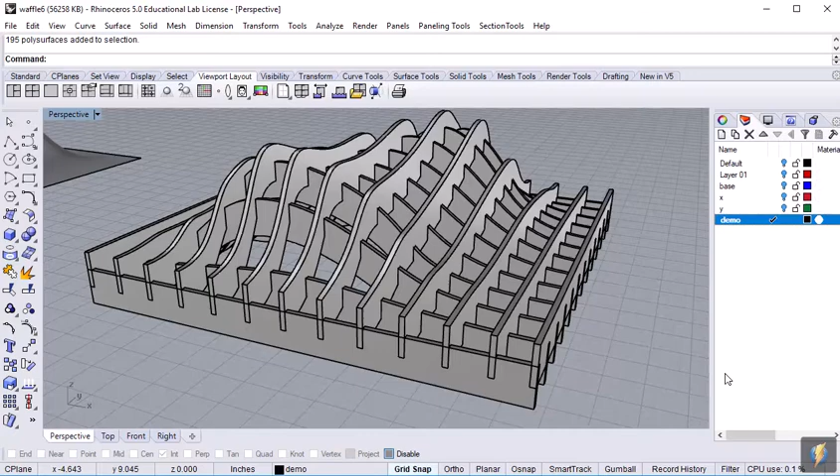If your Boolean split worked really well, then when you select one of these items, apparently it goes back to group again. It's kind of funky. I don't understand it, but you'll have to play with it a bit. So let's ungroup them and I'll show you what's going on in there.

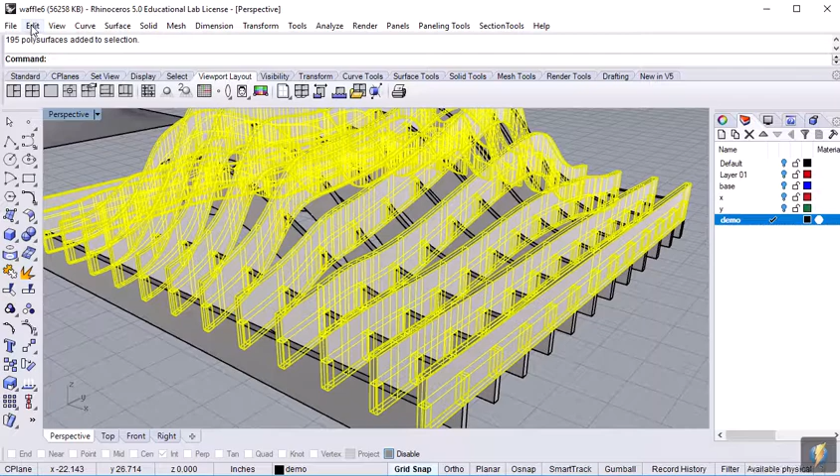Now you can see what's going on is a bit complicated because there is one piece that doesn't have the notches cut out, and then there's another one that does. So if we look at that front row, it's got all the notches cut out, and if we ungroup this one, same thing, we can select it, and the second one has all the notches cut out.

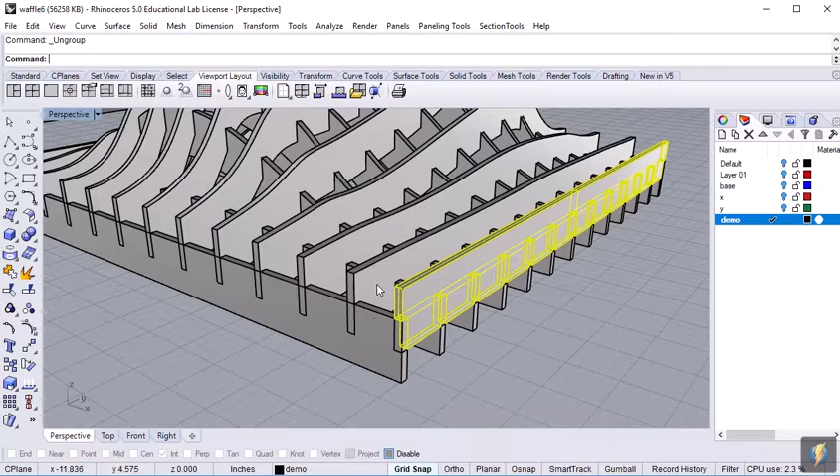Those are the pieces that we want to laser cut. The other ones we don't need, so you could get rid of them if you want, delete them. You just have to keep it clear, because every piece at this point that we're going to select is going to be the piece that has the notches cut out on them.

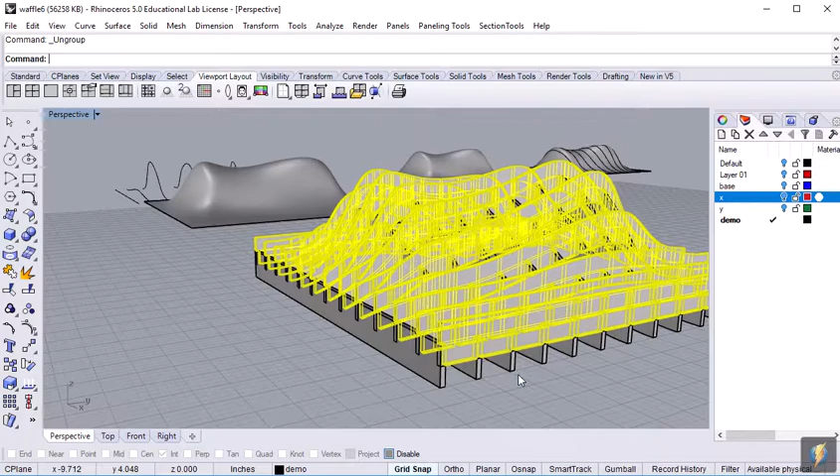So what I did here was I selected every, on the x-axis, each of the notched pieces. And what you can do is you can copy all of them to a colored layer. I did this already.

So if you look at the red, the y-axis has a green line. To remember that all the Y pieces are green—you know, Y is green—we can turn it on. So if we copy to a layer, here I made a layer called Y, and here I made a layer called X. I did that before the demo.

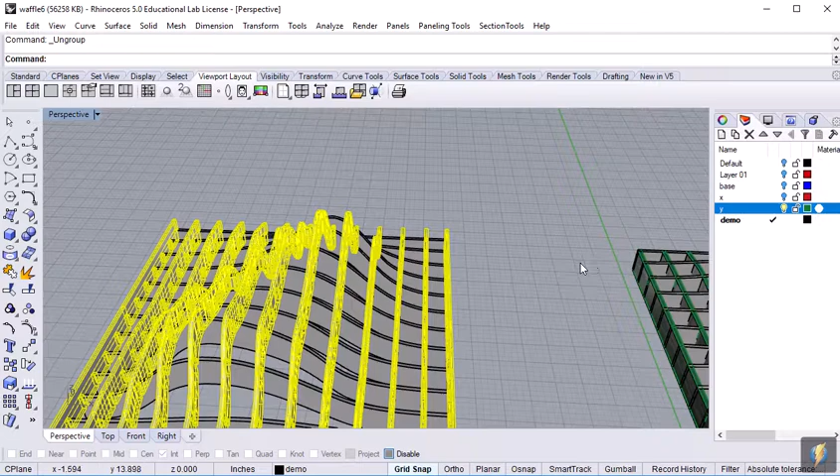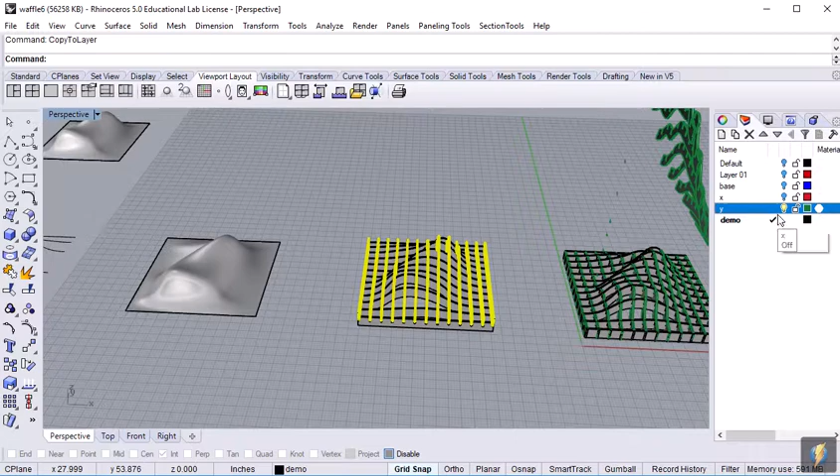The command for that is copy to layer. You just type copy to layer in there and you'll get the layer that you want to copy it to. What it'll look like is something like this—so I made all of these Y pieces green.

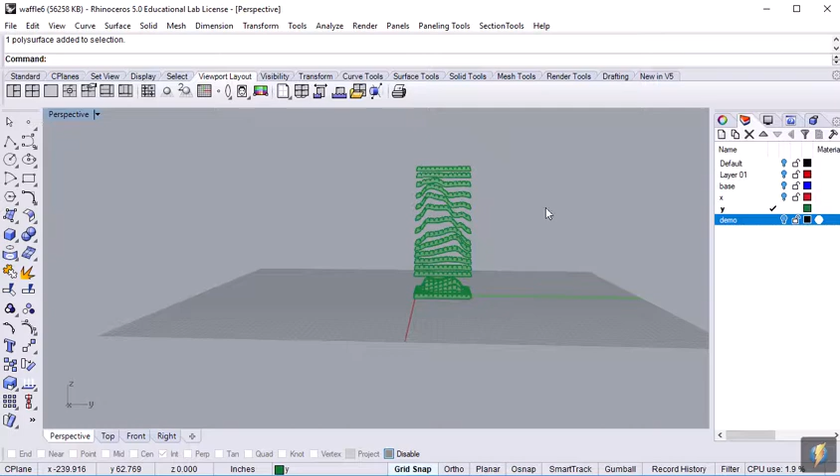Now to export these, we want to get all these pieces exported into Illustrator as an Illustrator file. So what I did—this is where it gets a bit time consuming and tricky—and I've got a lot of pieces in my demo.

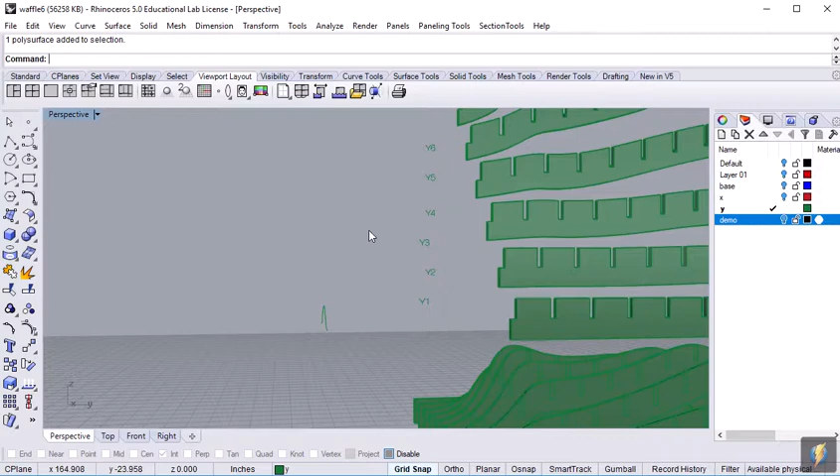You probably won't have this many pieces because it's way too complicated. But all that's happening here is I just raise them up. I just select, and you have to keep everything in order, so the trick now is all these pieces are going to be cut. But how do we know which piece—like to get them back together when they're cut out of plywood—it's really tricky.

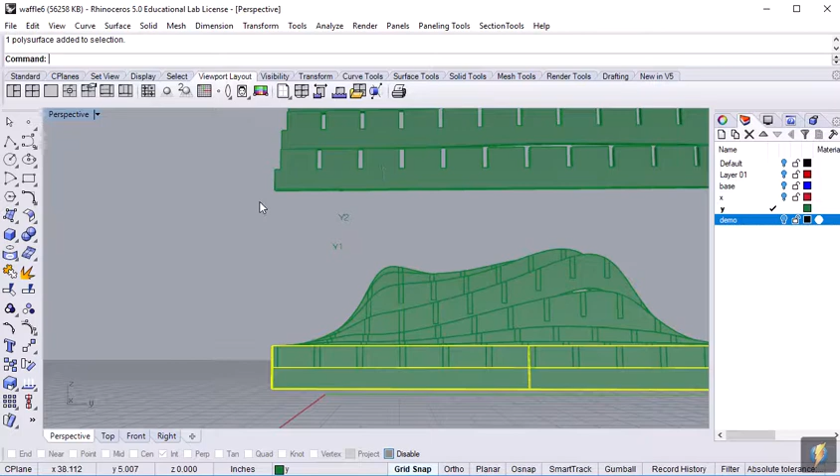So we're going to label them, and the laser cutter is going to label them. But to keep it all straight, you need to start out at this point and you're just selecting each piece and moving it up in order. So the first piece goes up here, the second piece, third piece, etc. And to do that, you have to make sure that you're in a two-dimensional view.

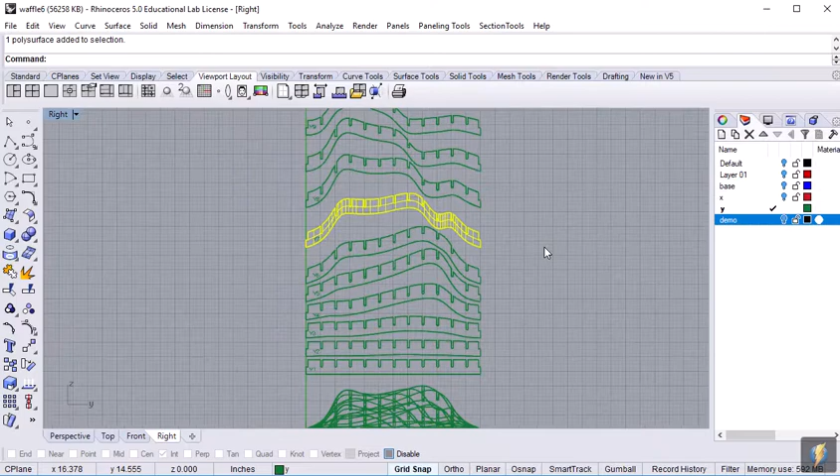So in the right view here, viewed from the right, when I export this, these are not going to be distorted, because if you export them from the perspective window, the lines will distort for the perspective.

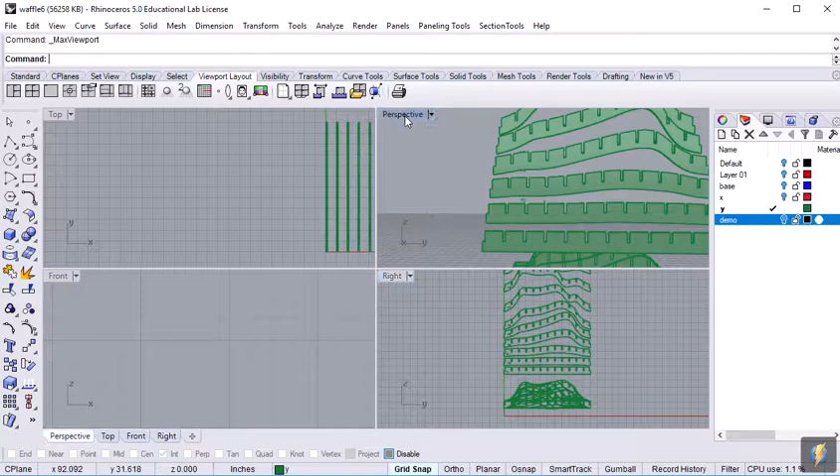And then the next thing we're going to look at—just so everybody's clear—I grabbed the first one, that's Y1. The second one in that row, Y2. So they're all basically on one dimension.

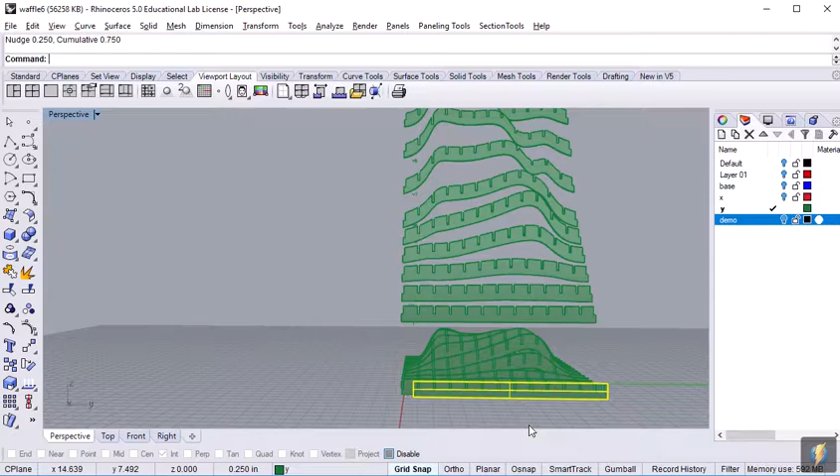So when you look at this from the top, from the side, it doesn't matter that they're spaced out, because you're just selecting one, and you use the option key. You want to go up. So the main thing here is that when you're in a two-dimensional window, they all line up and you're getting exactly what you want.

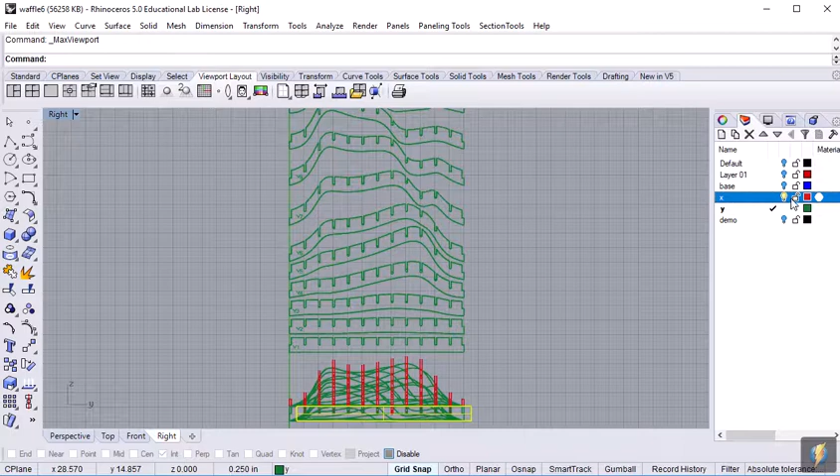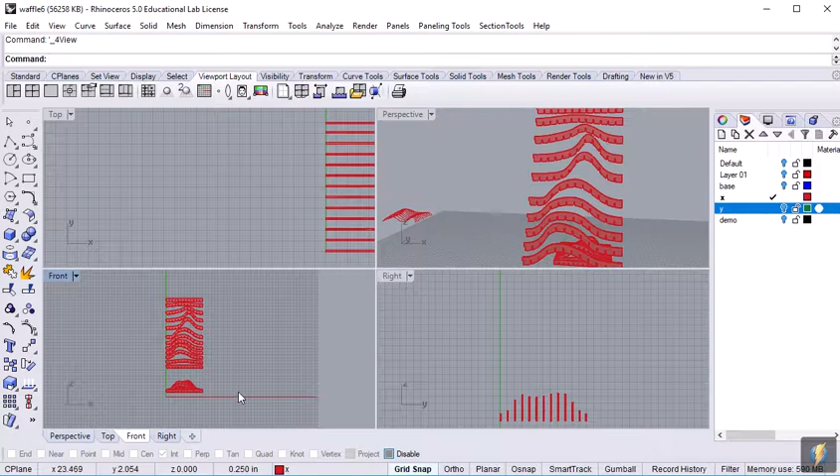And if we look at the X one, it's red. So if we look at what's happening on the X plane, it's exactly the same thing. In the front view, on the X axis, which is the red line, same thing—they're all ordered 1, 2, 3, 4, 5, 6, 7, 8, 9, 10, 11, 12.

Or 13, I should say. No, 12. Yeah, that's right. So the next video, I'll explain how to put labels on that laser cut really nicely.